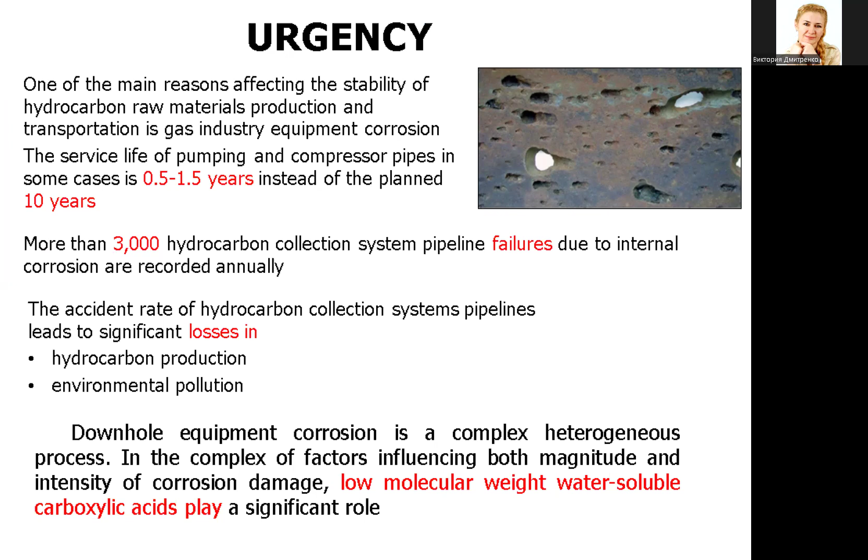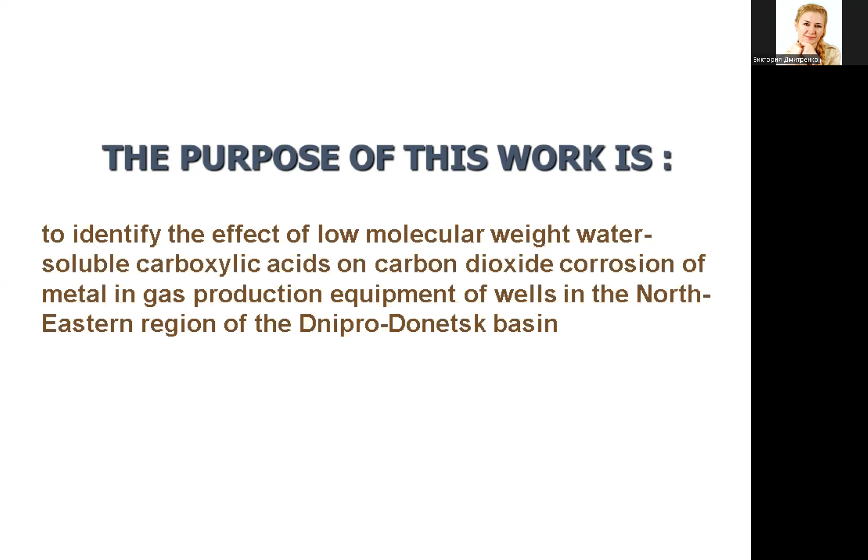The purpose of the study is to identify the effect of low molecular weight water-soluble carboxylic acids on carbon dioxide corrosion of metal in gas production equipment of wells in the northeastern region of the Dnipro-Donetsk basin. The rate of both surface and underground well equipment corrosion depends on various factors, the main of which should be considered the aggressive components carbon dioxide and low molecular weight water-soluble carboxylic acids contained in natural gas. So natural gas, hydrocarbon condensate, formation water, and pipe steel have been chosen as the object of the study.

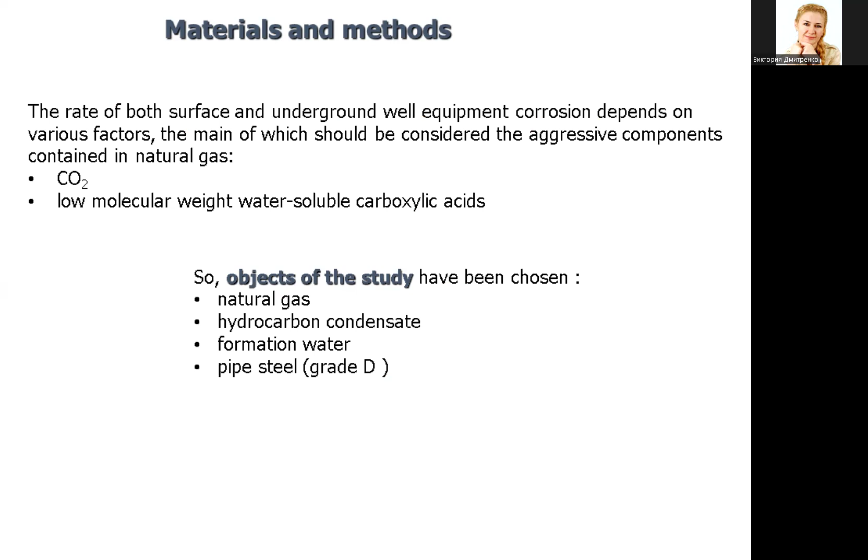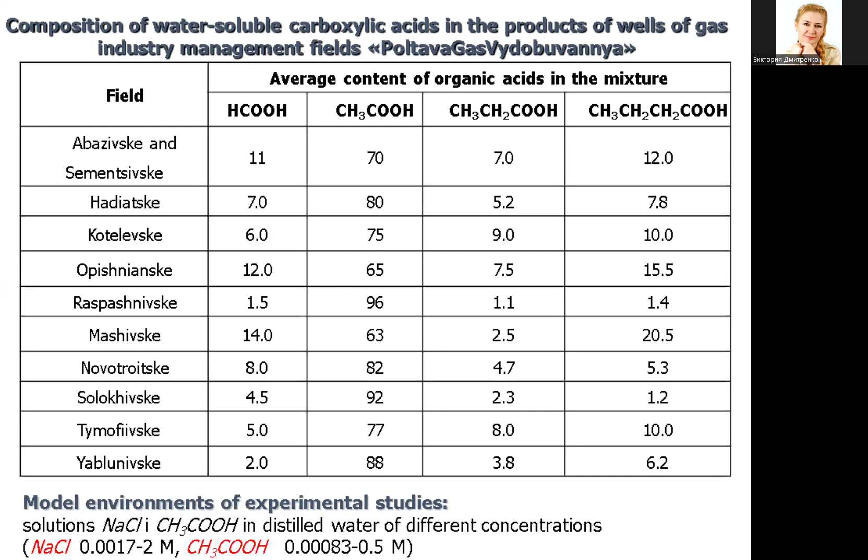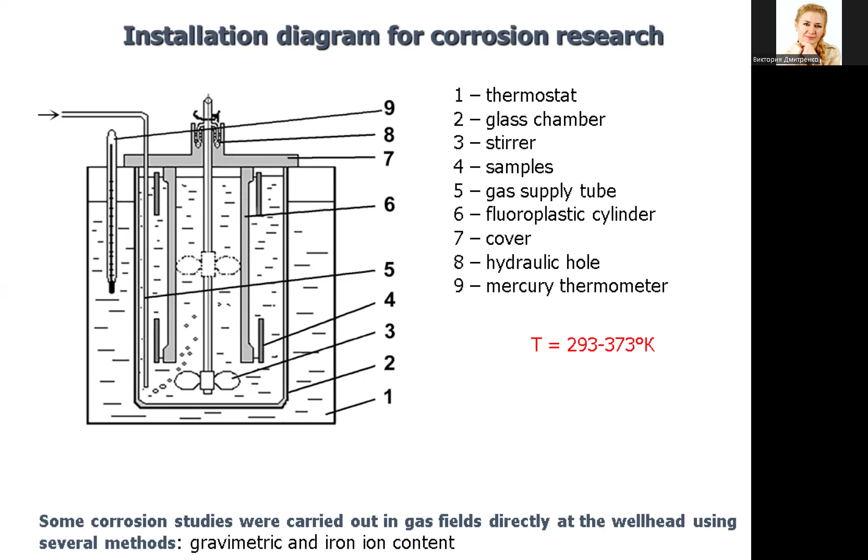In the low molecular weight water-soluble carboxylic acids mixture, the main component is acetic acid, which therefore has been taken further for laboratory study. Corrosion studies were carried out by gravimetric method in a thermostatic installation. The speed of stream flow in the area of placement of the metal piece was 7-8 meters per second in turbulent mode. Some corrosion studies were carried out in a gas field directly in the wellhead using several methods, gravimetric and iron ion content.

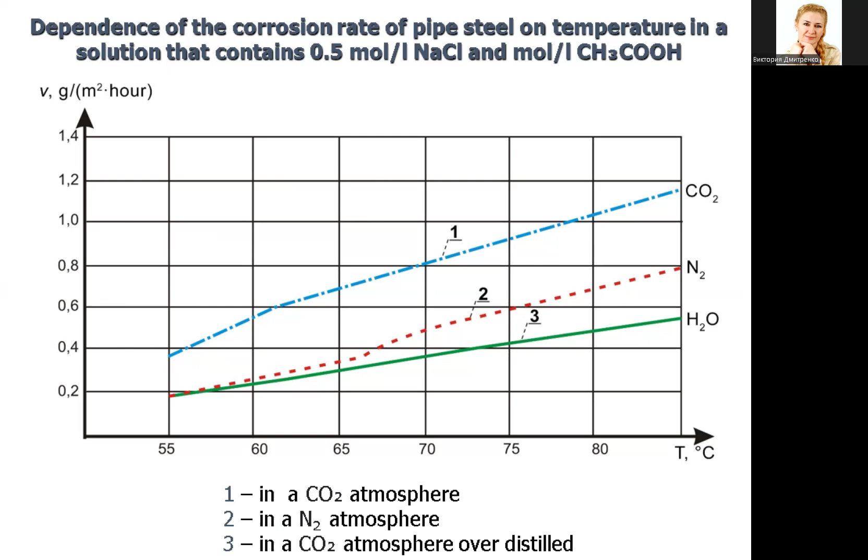It has been established that the corrosion rate of pipe steel over a solution of acetic acid in carbon dioxide is the highest, and in a carbon dioxide atmosphere over distilled water is the smallest. No corrosion of steel in nitrogen atmosphere over distilled water was detected during the experiment. Stabilization of the corrosion rate in the gas phase in the carbon dioxide atmosphere after nitrogen atmosphere occurs twice as slow than in a nitrogen atmosphere after carbon dioxide. From the given temperature and kinetic dependencies, it follows that acetic acid vapor increases carbon dioxide corrosion. However, the combined action of carbon dioxide and acetic acid causes more corrosion than acetic acid vapor.

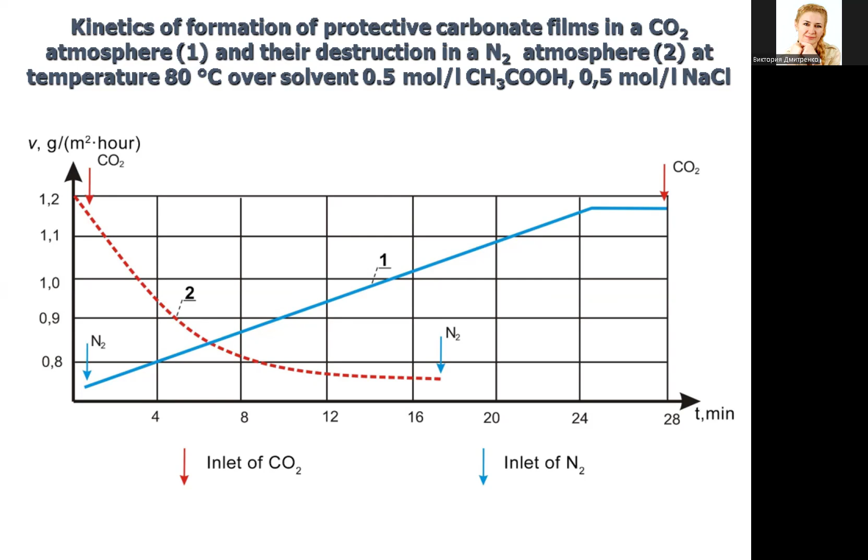The highest corrosion rate is at the beginning of droplet water condensation, since the main factors influencing the corrosion rate, acid concentration and temperature, are greatest at this point. The presence of carboxylic acid in condensation water shifts the interval for the beginning of the aqueous fluid condensation in the well towards higher temperatures and depth compared to pure carbon dioxide corrosion. The intensity of corrosion of the well bore was determined by the gravimetric method on a sample installed in the tubing and visually on the tubing raised during repair. At these deposits, there is a correlation between the concentration of ions and the concentration of organic acids in the condensation water.

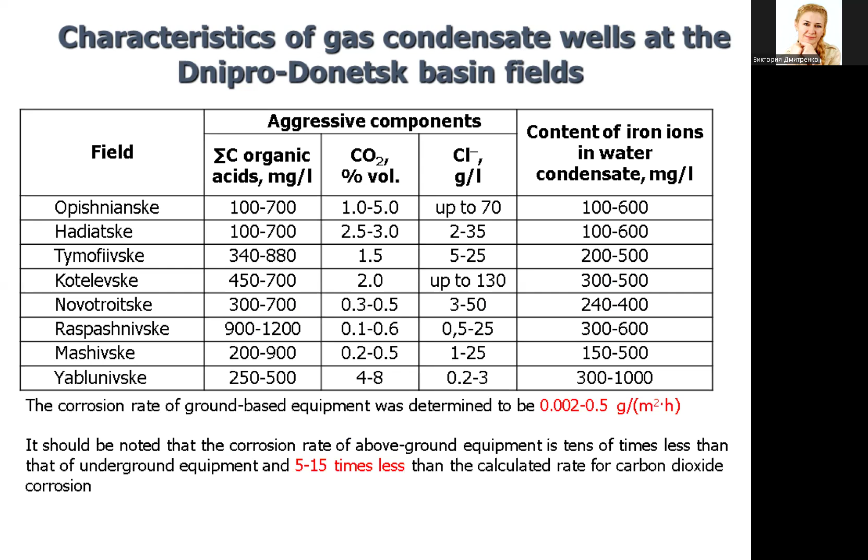It has been established that the interaction of organic acids with metal occurs in the Dnipro-Donetsk basin fields in the temperature range of 90–110 degrees Celsius and at a depth of 3,000–3,500 meters. The interval of action of organic acids on metal tubing depends on the constancy of the regime and operation time of the well. In the constant mode, the effect of organic acids is limited to 100–150 meters. The effect of corrosion under the influence of organic acids is especially pronounced in wells where the carbon dioxide content is insignificant, where carbon dioxide pressure is less than 0.02 megapascal.

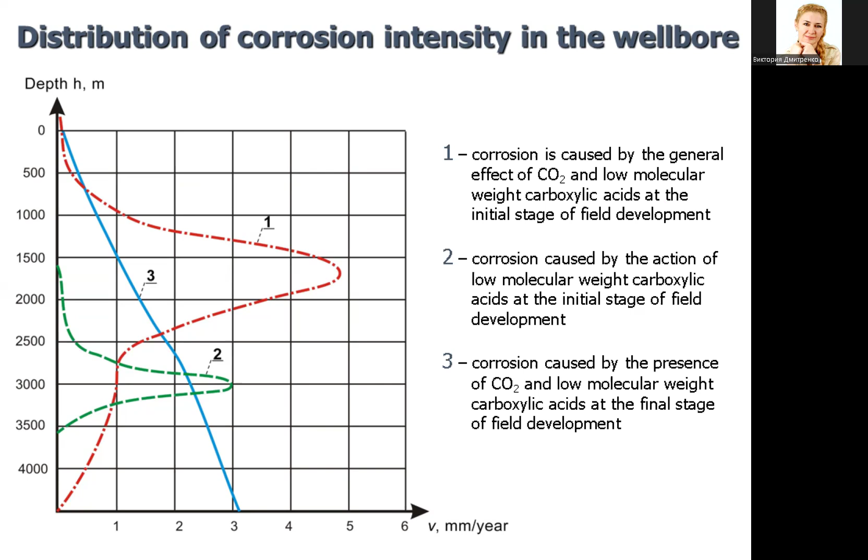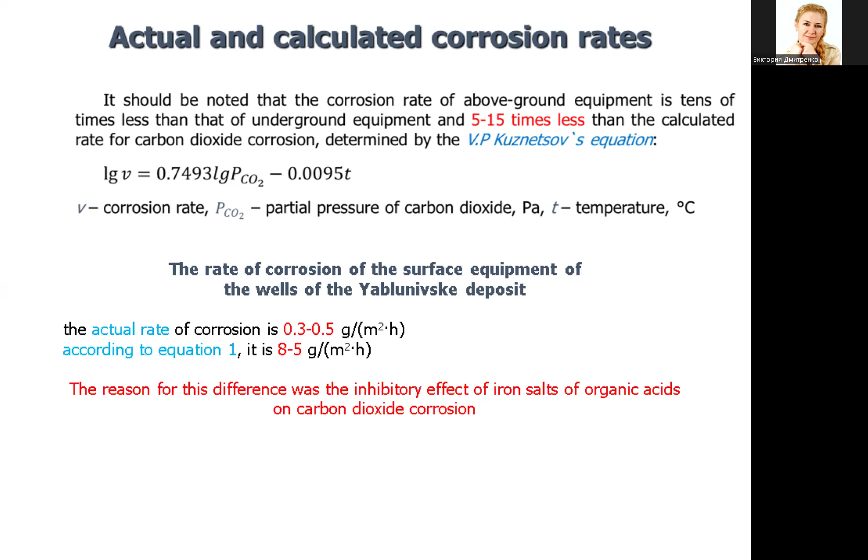It should be noted that the corrosion rate of above-ground equipment is tens of times less than that of underground equipment and 5–15 times less than the calculated rate for carbon dioxide corrosion determined by Kuznetsov's equations. The slide shows the calculated and actual rate of steel corrosion at the Yablunivske deposit. The reason for this difference was the inhibitory effects of iron salts of organic acids on carbon dioxide corrosion. This assumption has been confirmed by laboratory studies.

It has been established that the corrosion rate in the media taken from the well is 15–60 times less than in the model medium under similar conditions. After treatment of the selected reservoir water with oxygen to decompose iron salts and remove iron oxides, the aggressiveness of the water condensate increases 10–15 times. For example, the corrosion rate of steel tested under the same conditions in water taken from the wellhead of well number 61 of the Yablunivske deposit after removal of iron ions increased to 14 grams per square meter an hour. The iron salts of carboxylic acids, which are corrosion products during condensation of aqueous fluids in a well, are subsequently inhibitors of carbon dioxide corrosion of gas industry equipment.

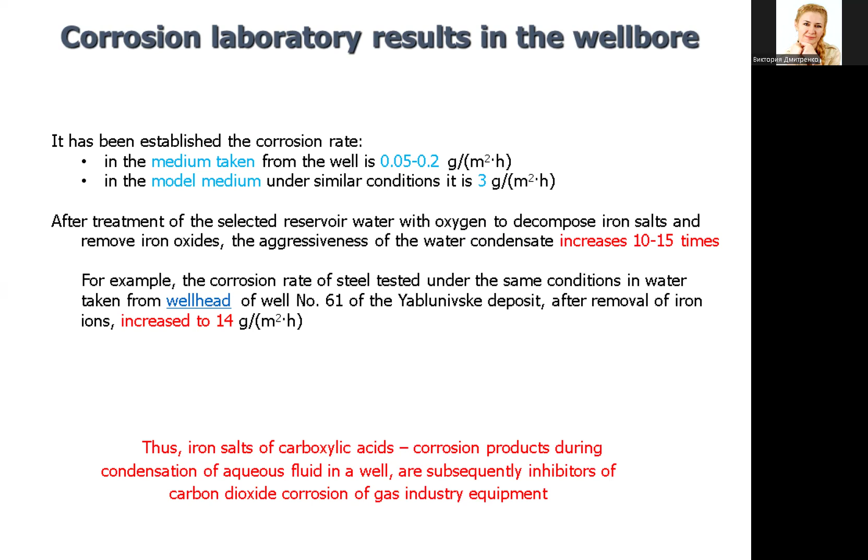So, in conclusion, firstly, the corrosive effect of organic acids entering the well along with water vapor is to stimulate carbon dioxide corrosion due to the destruction of oxide protective films. Secondly, the equipment corrosion intensity is determined by the concentration of carboxylic acid in the gas, temperature, and flow rate. Maximum corrosion damage in wells is in the range of the beginning of carboxylic acid condensation. And thirdly, iron salts formed as a result of corrosion, during further movement in the wellbore, plumes, and communications of complex gas treatment plants, are inhibitors of carbon dioxide corrosion.